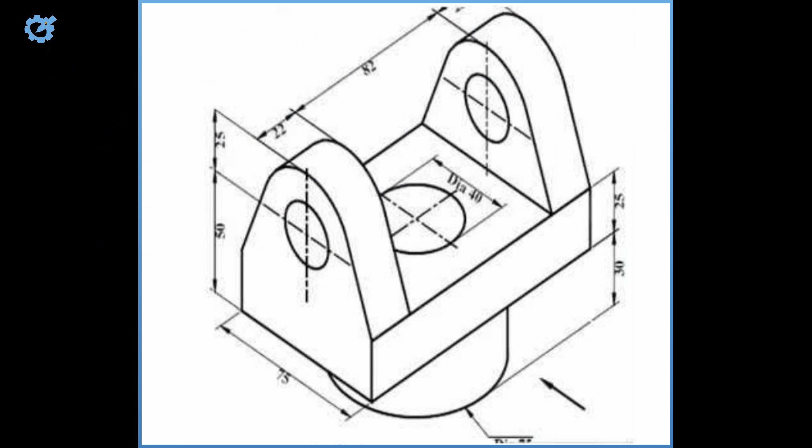We'll be reproducing the object on the screen using isometric projection. We'll be producing it in isometric projection. Alright, so the very first thing is I'm going to produce the bottom cylinder of diameter 75 mm, and to draw that I'm going to first of all produce a horizontal line in this order.

Then after that I'm going to produce a vertical line to it, and here is the vertical line like this. Each of these lines should be produced faintly. Now to draw an isometric, we'll be using our 30 by 60 degree set square. This is the set square right here. This longer part is the 30 degree, while this area is 60 degree. For this drawing, we'll be using the longer part, which is the 30 degrees.

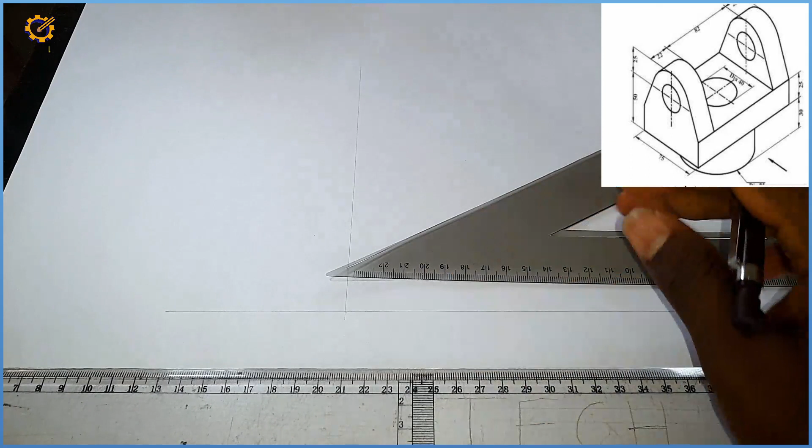From this point of intersection here at the perpendicular junction, I'm going to produce a line at angle 30 degrees to the horizontal plane, which is this, like that. And towards this side also I'll be producing a line at angle 30 degrees to the horizontal plane, which is this also. Take note of those lines.

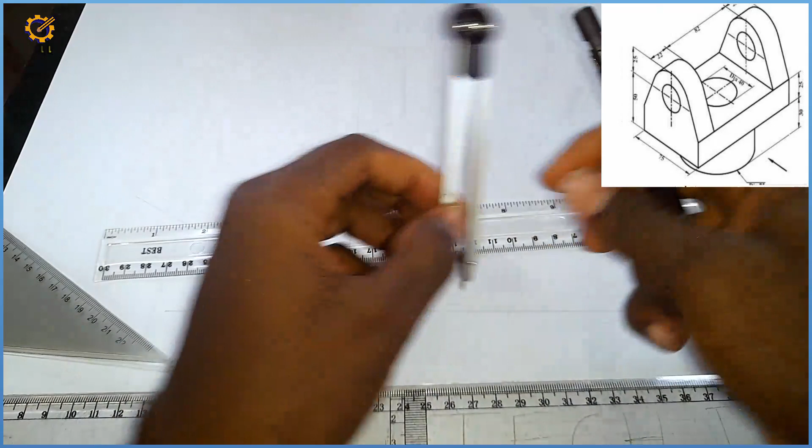Now the base of this cylinder is diameter 75, and to proceed with that I'm going to pick my ruler and measure 75. Let me just pick my compass to make it far easier. I'm going to measure 75 mm with my compass. This is 75. Standing at this junction, I strike an arc right here. Then on this axis also I strike an arc right here with the same 75.

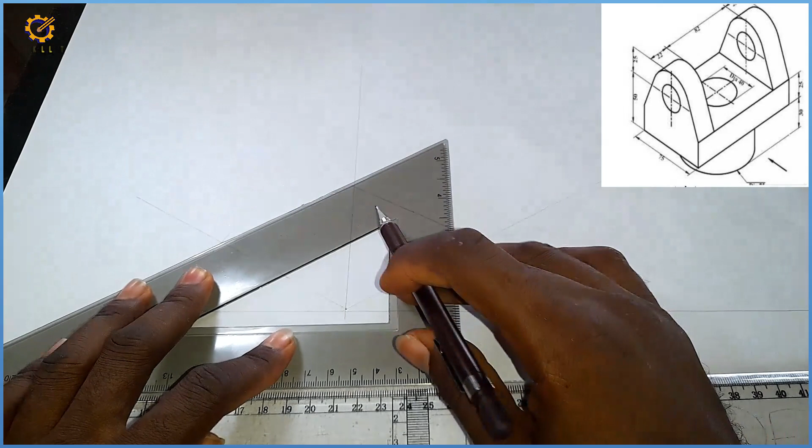Doing that, I'm going to pick my set square with 30 degrees. I'm going to project from the 75 here like this faintly. Then also I'm going to project at the 75 here also, like this faintly. So from this area 30 degrees and from this area 30 degrees, I have that base right there.

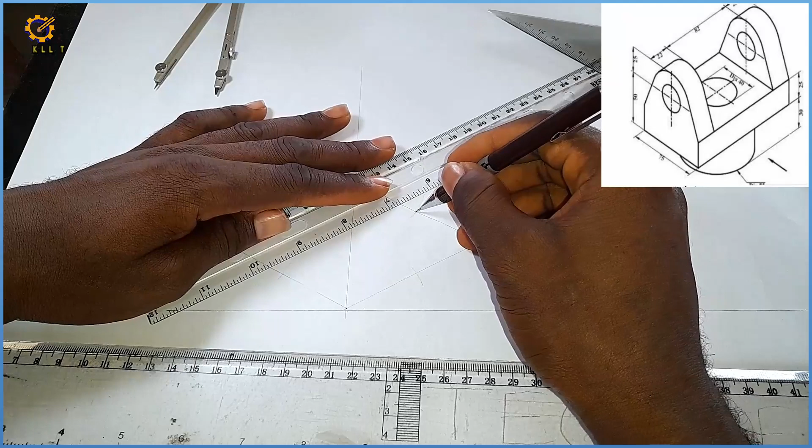With my compass, half of 75 is 37.5. With my compass I measure 37.5, which is this. I'm going to stand right here and mark, right here mark, and right here I mark. With that I'm going to pick my ruler and join those midpoints together faintly like this.

Do you see that? Take note. Then likewise from this area I'm going to join it faintly, midpoint to midpoint, like this also. So we have that. Then I'm going to join this junction to this junction, which is the longest diagonal, with my ruler faintly also.

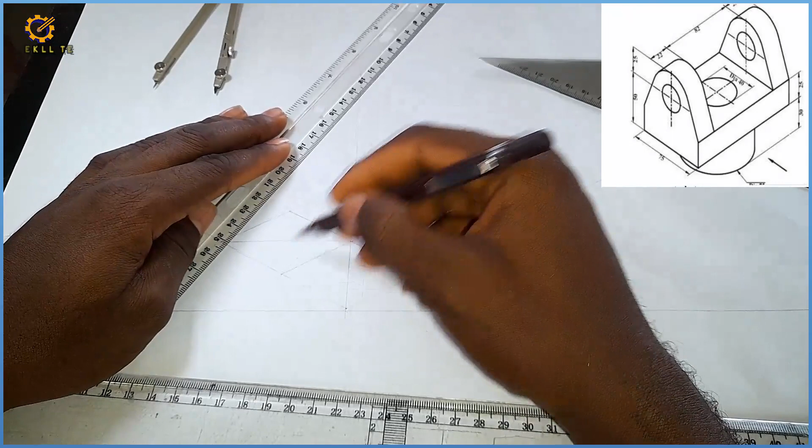After doing that, I'm going to pick my ruler from this junction here to this area here and draw this. Take note please. I'm going to draw this like this. You see that? And from this junction here to this junction here, I'm going to draw this also faintly.

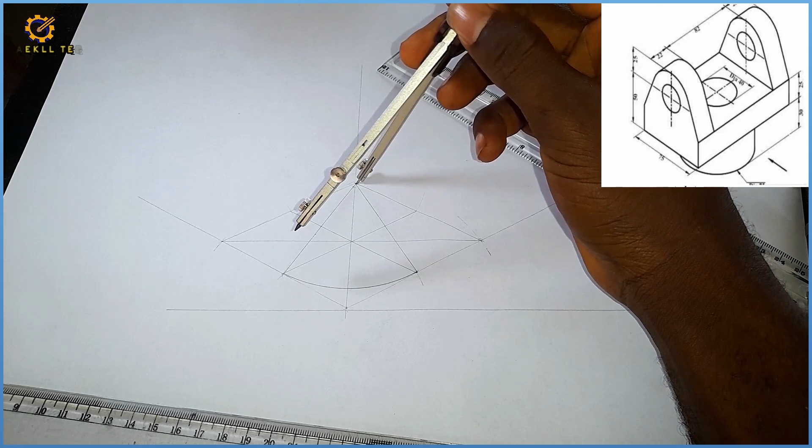Doing that, I'm going to pick my compass. I'm going to sit at this junction comfortably, then extend my compass all the way down to this area here. With that radius on my compass, I draw this. You can decide to draw it faintly or thick, it's your choice. Then you can come back and retrace it. So I'm drawing this now.

What we're actually applying here is the principle of isometric circle or isometric curve, so take note of that. Now from this junction here, I'm going to place my compass right here, then I'm going to pick this radius right here. With that radius I'm going to draw it like this.

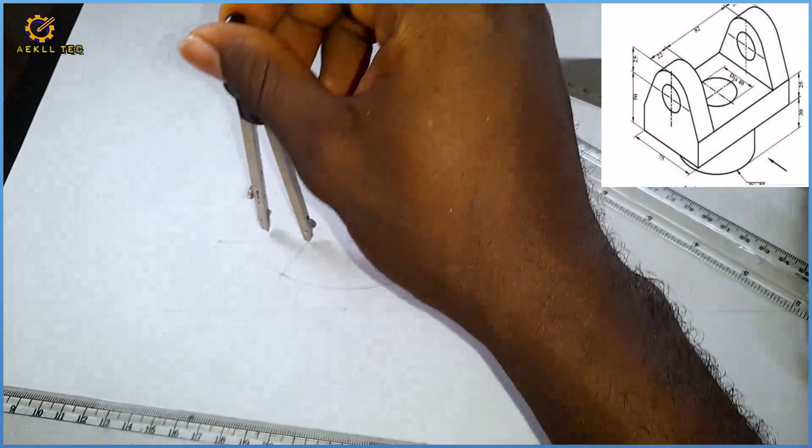You see that? All right. So likewise on this area, but faintly on this area, I'm going to do the same thing faintly like that. Take note of that. All right. Now, the next thing is this.

I'm going to pick a height of 30 mm from this junction here. Okay, height of 30 mm, and that is because the height of that cylindrical part is 30. So from here now I pick 30. This is the height of 30. Okay, from that height of 30, with my 30-degree set square, I'm going to slide it to that area right there like this. Okay, sliding it to the area right there like this.

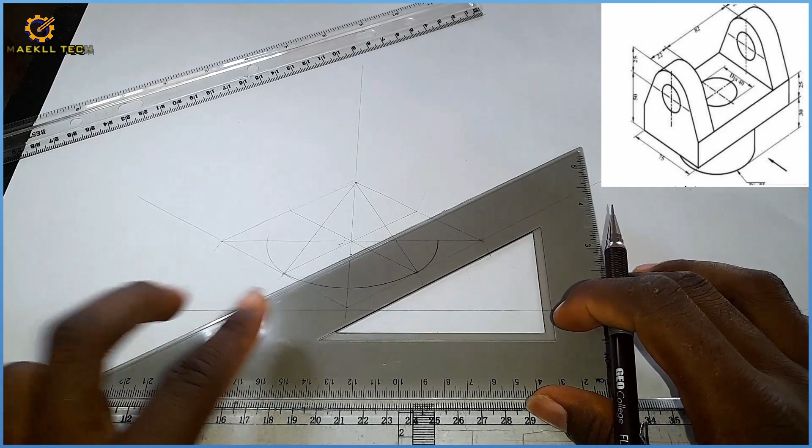All right, then I'm going to draw a line like this faintly all the way through like that. Take note of that. All right, so with my 30-degree also, okay, not with my 30-degree yet. I'm going to pick my set square from this junction here. Okay, from this junction here, I'm going to draw a perpendicular upwards faintly. So the perpendicular line touches this line here on this area here.

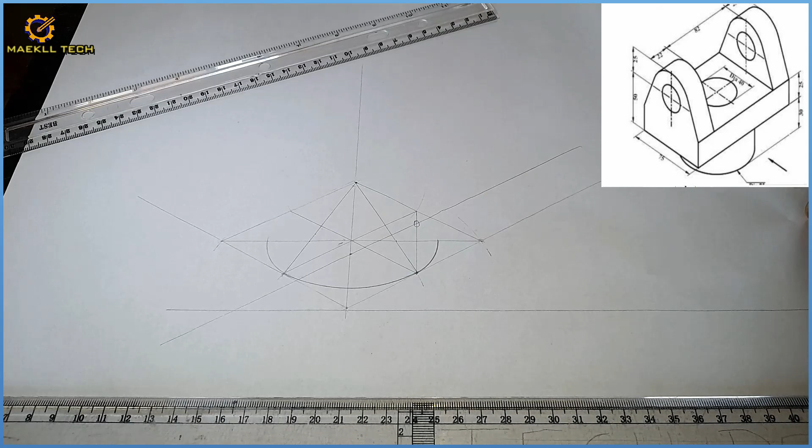So I'm going to pick my compass or my ruler. The total length of our object here at the base is 82 at the middle, 22, 22, and that is a mark of 126. Take note, I am producing this object on the scale of 1:1. So if you want to produce it on the scale of 2:1, you just multiply all the dimensions by 2. But I'm drawing this on the scale of 1:1.

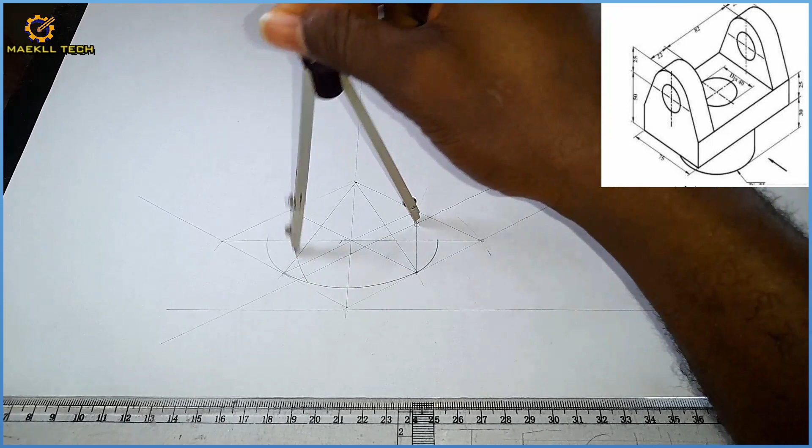So I'm going to pick length of 126 divided by 2, which is 63. I'm going to pick length of 63 with my compass. Okay, radius 63 with my compass. I'm going to stand right at this junction here. Take note. Do you see this junction here? I'm going to strike an arc towards this direction and strike an arc towards this direction. Take note. Do you see that?

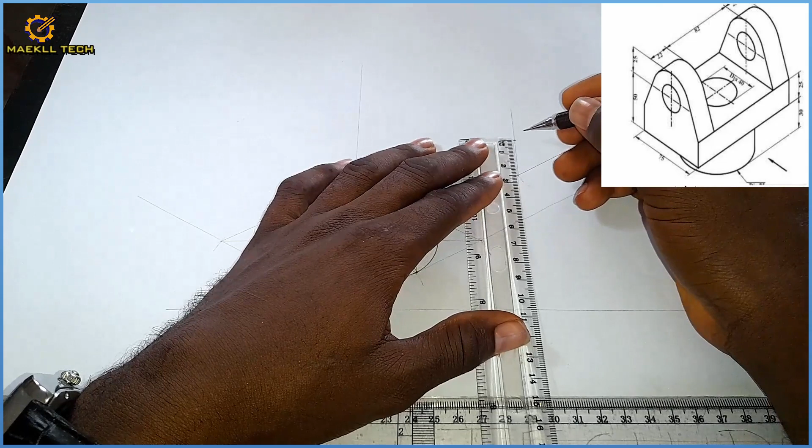So after doing that, I'm going to produce perpendiculars or vertical lines at those marks. So the first mark here, I produce that. This mark here, I produce that also. And the thickness of this base is 25 millimeters. So with my ruler, I measure a mark of 25 millimeters, which is this. Right here also 25 millimeters, which is this. And with my ruler, I draw this.

You can as well make it thick once and for all, because I'm needing it. So I draw this, I make it thick. Alright, take note of that. So I'm going to pick my set square. I'm going to draw this perpendicularly to this base here. See that? I'm making it thick also.

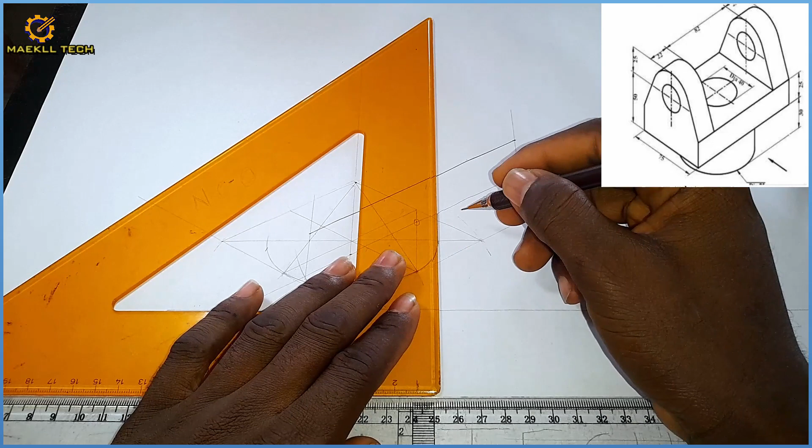Alright, and I'm going to pick my ruler. I'm going to take in this area also like this. I'm going to take in this all the way down here like this. So take note. I'm taking that all the way to that area. Okay, and I'm going to take in this like this. Alright, so we are proceeding.

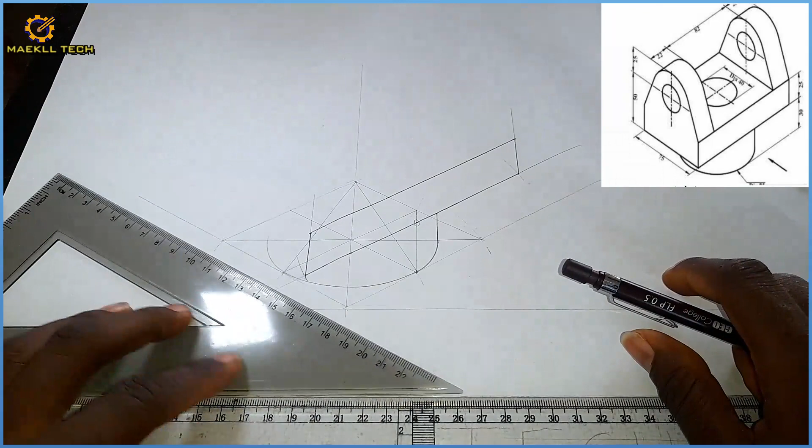So just take note. I'm going to pick my 30 by 60-degree set square at angle 30 degrees towards this direction here. I'm going to project 30 degrees at the bottom like this from that junction, faintly first like that, then sliding it to this area, 30 degrees also like this. Take note.

Alright, so I don't need this any longer. I can actually erase this. Let me erase this so that you don't get confused. So this is the one I'm using. I'm not using this, so I'm going to take this off like that. So do you see that?

So not forgetting that I'm going to actually stand at this junction again, and I'm going to finalize this area, which is here, and that is all I need from that area. You see that? So which means this is not needed. I'm going to wipe it off.

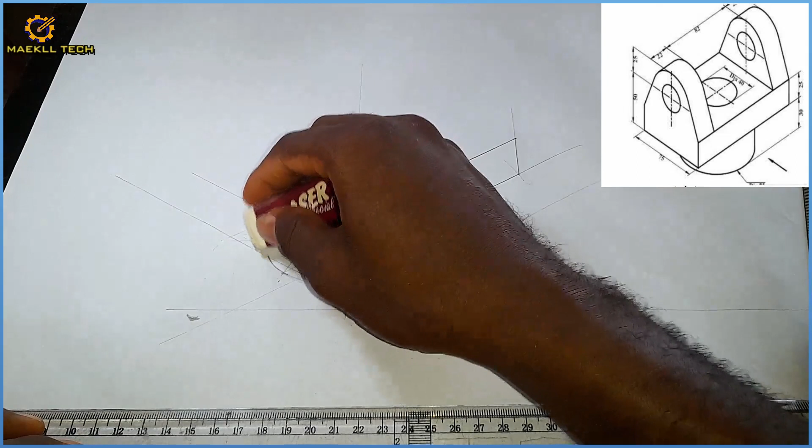Take note. Now with my set square also at angle 30 degrees, I'm going to slide it all the way to the top here. Do you see that? All the way to the top right there. I'm going to draw this also faintly like that. Take note of that also. Let me remove this to avoid confusion.

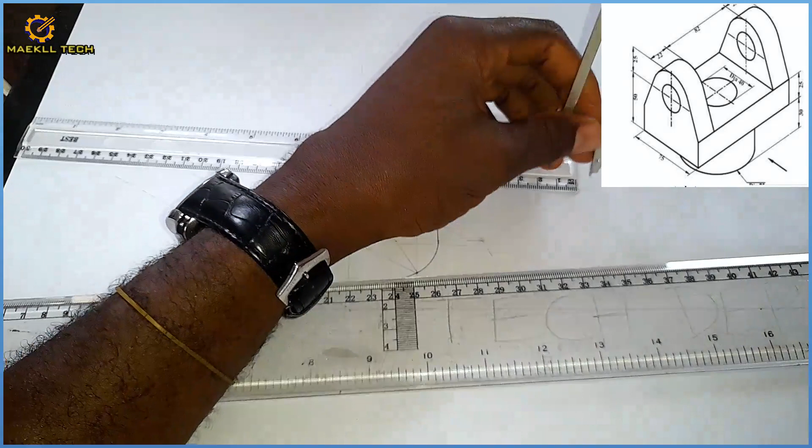Okay. Now the width of our object is 75. So with my ruler I measure. Okay, let me just use my compass to avoid mix up. So with my compass I measure 75, which is this.

Okay, this 75. With 75 on my compass I stand right here at this junction. Standing at this junction, let me just confirm that dimension again so as not to make any mistake. Okay, it is still intact. With 75 I stand right here, I mark. You see that? With 75 right at this junction here also I mark. Probably from here also I mark.

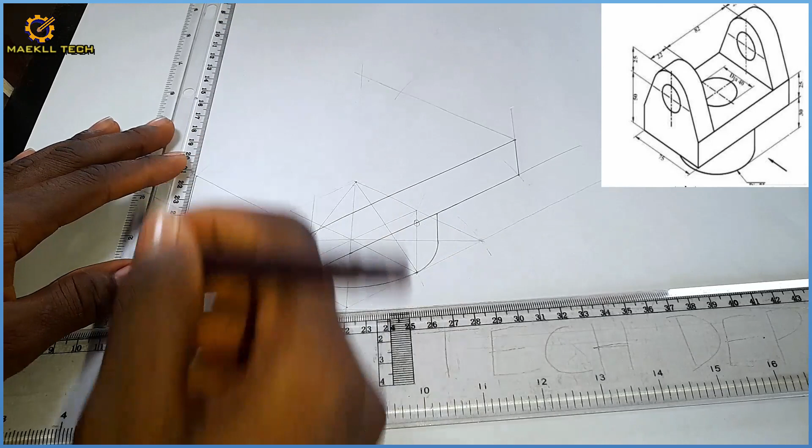So with my ruler I can join these areas together like this. I'm going to make it thick once and for all, making it thick like this. Then here to here I'm going to make this area faint, thin here, faintly like that. Take note. All right, so this bottom part I'm going to make thick also.

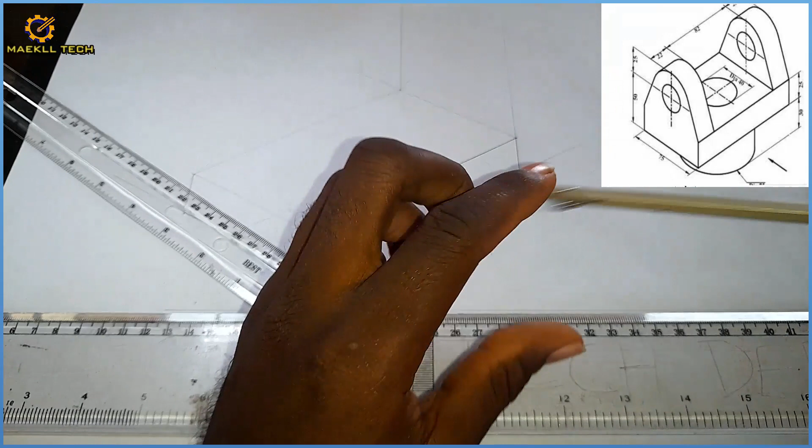Now the real work begins. Yeah, don't be amazed I said the real work begins. You actually see what I'm trying to drive home. So I'm going to extend this vertical line here faintly upwards. Likewise from this area also faintly upwards like that. You see that? Now I'm going to pick my compass. No, I don't need a compass. I can use my ruler.

Sorry for the noise, my place is close to the airport, right? So that's the noise you're hearing in the background.

I'm sorry for that. So from this junction here to the top is a mark of 50. From this area to here is 50. So from this area to the top here is 50. I'm going to align it like this and draw faintly, joining them together faintly like this. Did you see that? Okay, now take note of that.

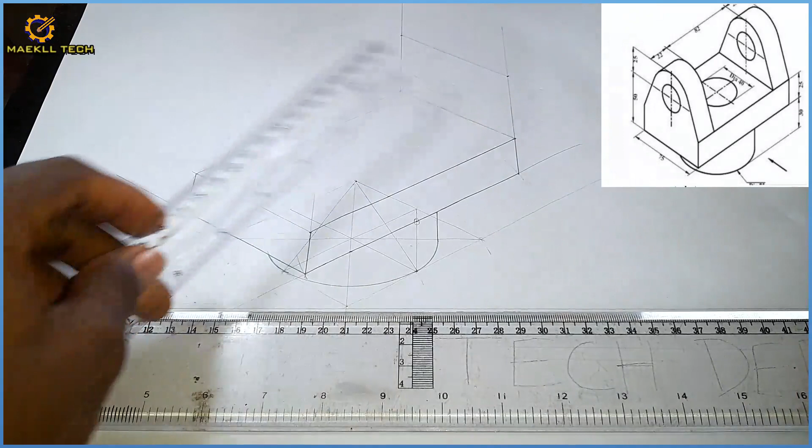So I'm going to get the midpoint of this thickness here, this dimension, and the midpoint is 75 divided by 2, that's 37.5. With my compass I pick 37.5, which is this. Then I come here, I mark. I come here, I mark. I'm going to join those 2 points vertically, faintly, like that. So take note of that.

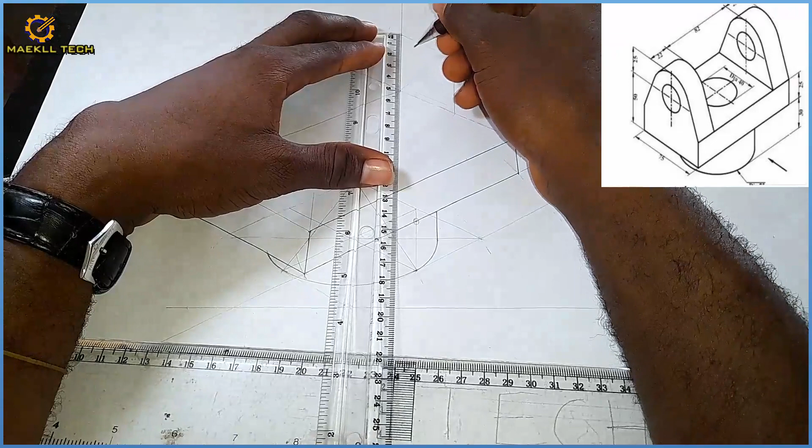All right. So this height of 50, I'm going to get the midpoint, and the midpoint there is 25, which is this right here. And likewise, from this area 25 is this. So I'm joining those 2 points also faintly like this. Now, what's the next thing?

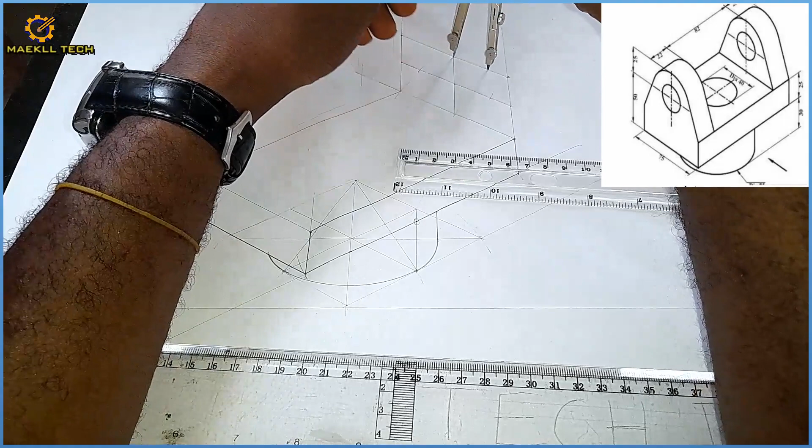The radius at this top here wasn't given, but since the distance from here to here is 50, I'm going to use a radius of 25. So I'm going to pick my compass with radius 25. Radius 25 is here to here, like this. So with 25 I'm standing right here at the junction in the center, marking left and right. I'm standing at this one up here, marking left and right.

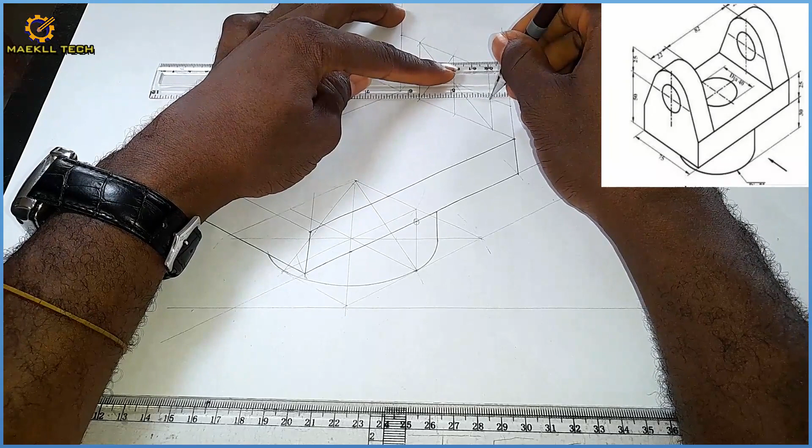Having done that, with my ruler I'm going to join those 2 points together vertically like this, faintly. You see that? Then coming down here also, faintly. The principle I'm applying is the same thing I did here, the principle of the isometric circle or isometric curve. Next I'm going to join this longest diagonal here faintly, then join this area to this junction faintly, then this area here to this junction faintly.

After doing that, I'm going to pick my compass, sit right at this junction here, and extend my compass to this area right here. Take note of those points, and I'm going to draw this faintly first of all. Then standing at this junction right here, extend my compass to this area and draw this also faintly. Take note, I'm drawing them faintly.

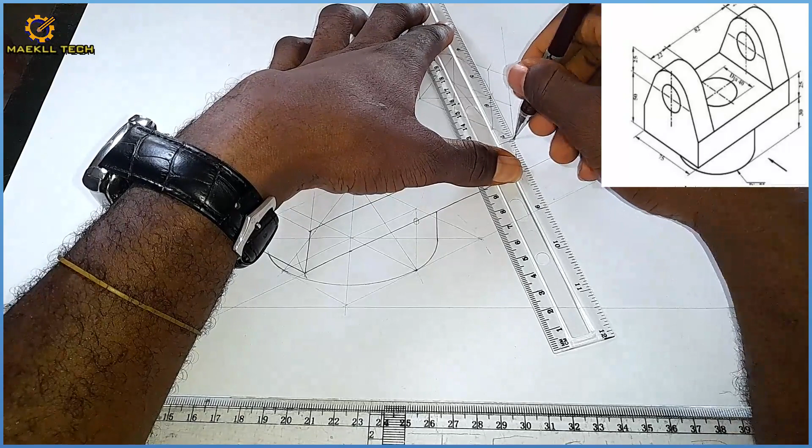So from this junction right here with my ruler, tangential to this arc. You know what a tangent is? A straight line that touches the circumference of a circle or an arc at a point. So I'm going to draw from this junction to this arc, this part of the circle, tangentially. I'm going to make that bold once and for all. Do you see that? That is settled.

Since that is settled, I can thicken this from here. I'm going to repeat this and just thicken it out like that. Then this, I'm going to pick this.

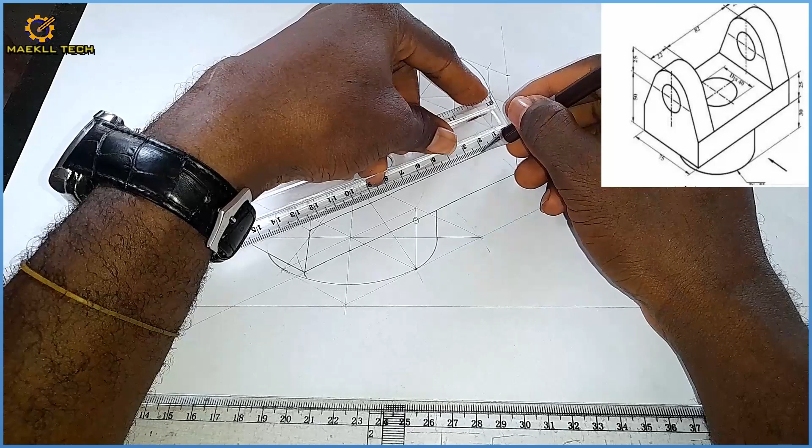So from the midpoint here, from the middle there, I thicken. You see, I thicken from the middle there. I don't actually need this part here. So that's it. So are you following? Please look closely. So now the distance of our object of this area here from this edge here inwards is 22. With my ruler I pick a mark of 22, which is that. From this area, mark of 22, which is this.

Now the reason why I'm measuring a lot is because the set square I was using, my 30-degree set square, somebody stole it from where I left it. Because when I did the photographic, I left it to sort some stuff. So before I came back, somebody stole it. So I just need to improvise, alright? So just bear with me. Okay, so this video might be somehow long. Just bear with me. I'm very sorry for that.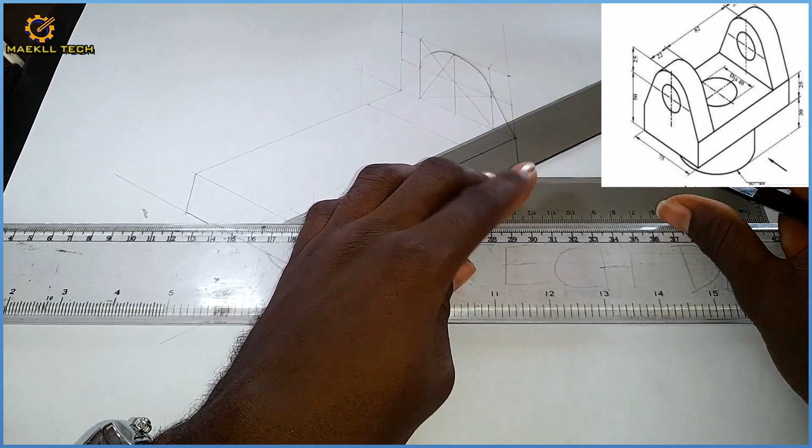Okay. Now, having this to this 22, here to here 22, I'm going to produce a vertical line. Do I need that? No, I don't need it on the outside there. So this is what I'm going to do. I'm going to pick my 30-60-degree set square, my 30-degree set square. I'm going to come here like this, slide it to this junction here, and draw from here faintly. Do you see that? I'm going to slide it here, draw from here faintly, then from here also, like this. So take note of those areas.

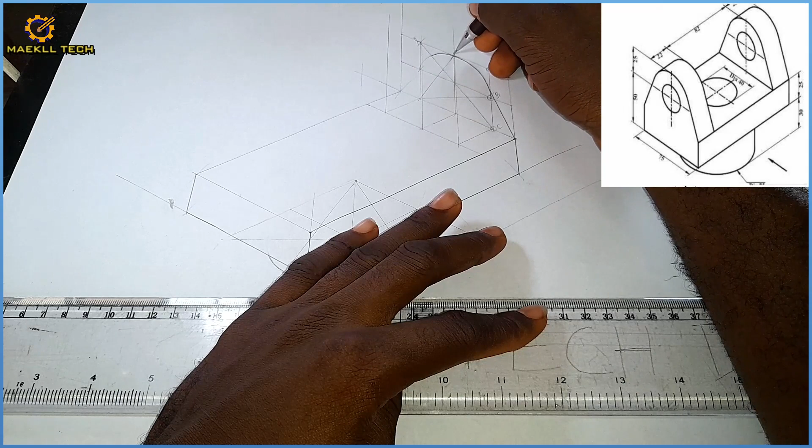Then I'm going to pick my set square. Each of those junctions will be projected vertically upwards. One faintly, two, and three. So take note of those points. Now note this area here, I'm calling this A. This area here, I'm calling it B. And this bottom here, I'm calling it C. This area here, I'm calling it D. This midpoint here, I'm calling it E. Take note. All of this stuff, you don't need to do that on your paper. I'm just trying to show you something so that you don't get confused.

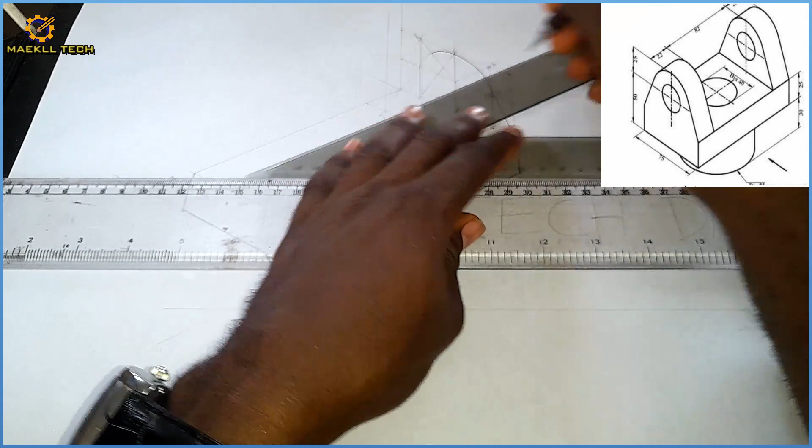So from mark B, which is the midpoint here, take note of this line here. I can denote this as H, I, and J. I'm going to project the midpoint of B to my H here. So from the center of B, 30 degrees. So here is my B complement, this junction. Take note. And my A also will be projected like this. So here is my A complement, take note of that. So from my A complement I can project this.

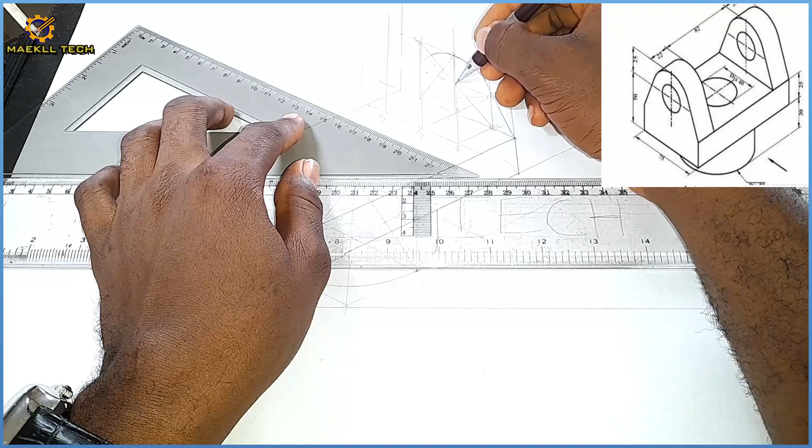Let me just erase some stuff so that I don't get confused, like this. So take note of this line here coming to this junction, where this H and A intersect. That way I'm drawing now, projecting it at 30 degrees, like this. Did you see that? It should be faint on your own paper. So now K, J, K, H, A complement. I have another square on the inside now. Take note, this square. That's what I'm dealing with now.

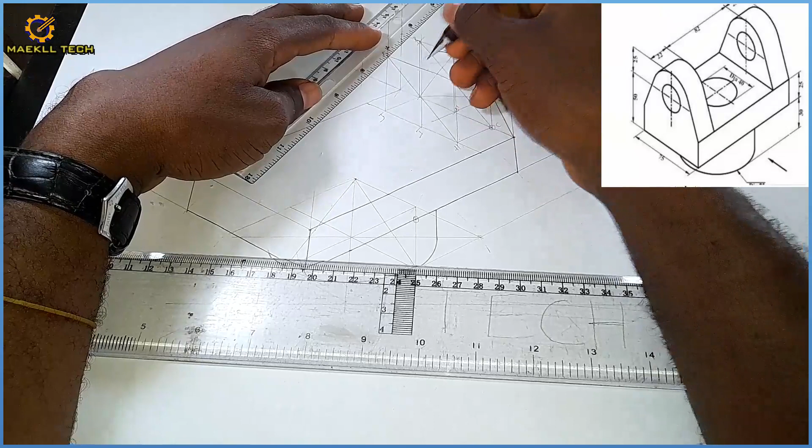So I'm going to join the longest diagonal here also, faintly, like this. After doing that, I'm going to pick my ruler. Take note of this area, this I, where it intersects here. Take note, please. Maybe I should just zoom it out a little for you, so that you can see what I'm doing clearly. Yeah, I think it's better this way. So from this junction now, this I line, let me show it very well so that you can see. This one is not part of it, so that you don't get confused.

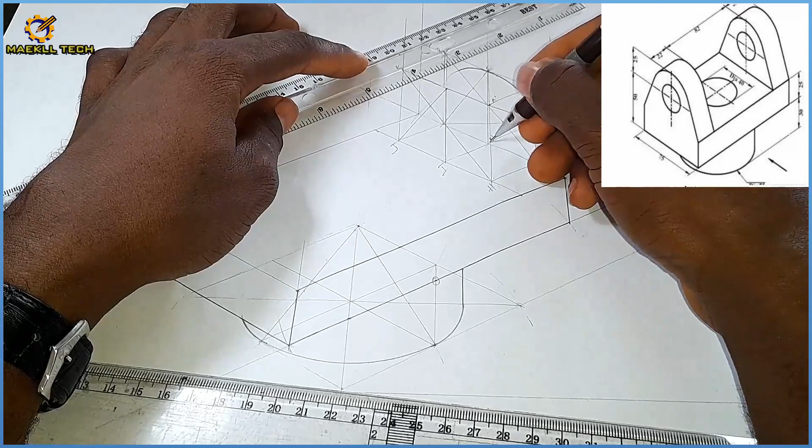Yeah, this I line, okay, that junction to this area, like this, faintly, you see it. Then this area here, this junction here, take note where this B and this H intersect, which is here, to that same midpoint here. Okay, faintly, you see that also. So then I'm going to pick my compass.

Picking my compass, I'm going to come right to the junction here, extend it to this area here like this, and draw something. I'm going to make it faint first of all. Alright, then I'm going to place the same compass right here like this to this very junction here, and draw this also faintly like that.

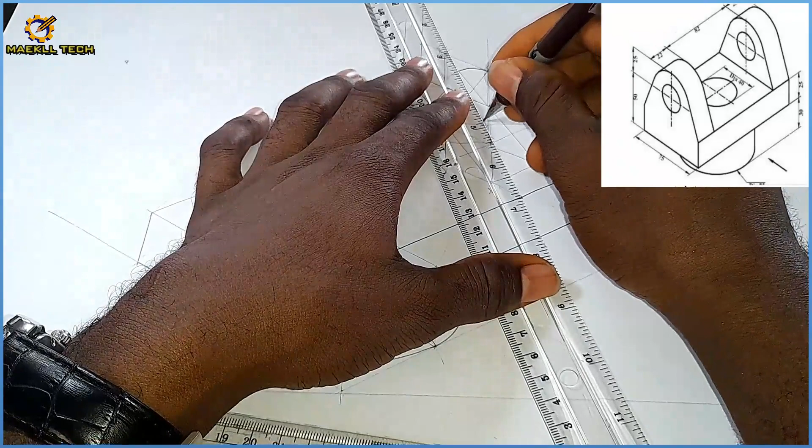So I'm going to pick my ruler. This is my mark of 22 here. Okay, tangentially to this, the same thing I did here, tangentially here. So I'm going to draw this like this, make it thick once and for all. So having it that way, the midpoint here to the midpoint here. Okay, take note of that. I'm going to join that like this. I'm going to make it thick once and for all.

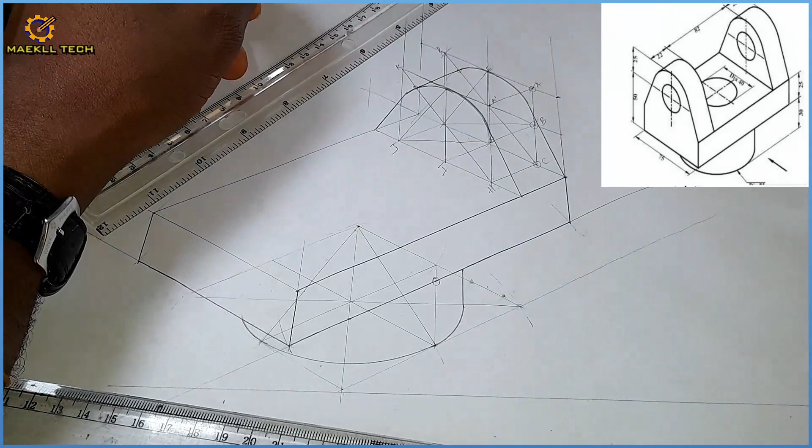Then from this junction to this curve here, I'm going to just make it tangential like this. Okay, tangential like that. Then I can now take out the stops with my compass. Alright, I'm taking it out with my compass right there. Then from here also, so that is it. So this area is set like that. Can you see? But it remains a circle on the inside, and that circle is diameter 25.

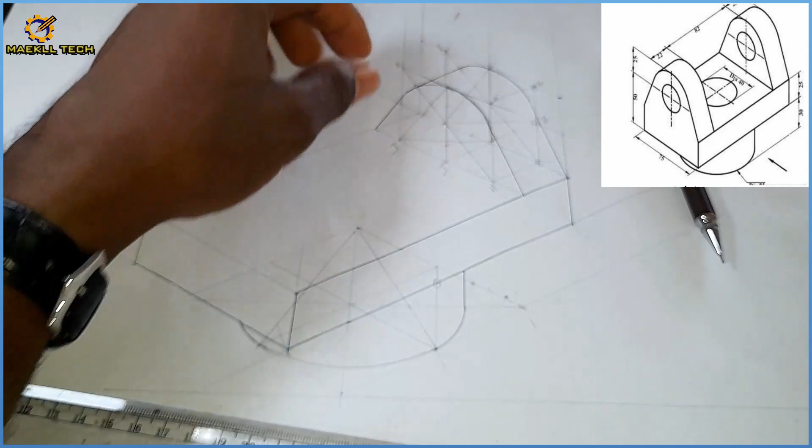Diameter 25, that is going to be radius 12.5. Okay, so with my compass I'm picking radius 12.5, which is already there. Sitting at the center, take note, sitting at this middle right here, I mark left, right, and from that same middle, bottom and top. See, I mark. So with that I pick my 30-degree set square.

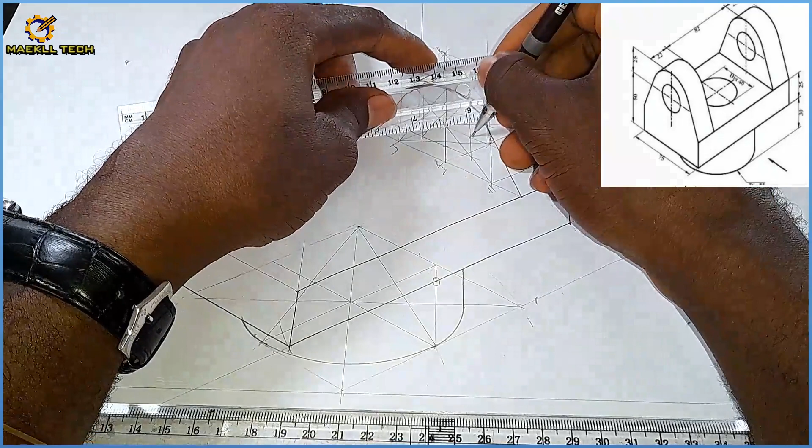Okay, I project to the bottom where I mark, I draw faintly. I project to the top which I mark, I draw faintly. Alright, then vertically on this mark here, I draw faintly. Then on this mark here, vertically, I also draw faintly. Alright, so doing all of that with my ruler from here to this place here, I make it faint, from here to here also.

Make it faint. So picking my compass now, standing right here to this area here. Take note of the point I'm picking. That's why I'm not fast. It's okay, that's why I'm taking it slow. Okay. So I'm going to draw this. You see that? Okay. Standing right here, from here to here. You see that? This junction to this junction here.

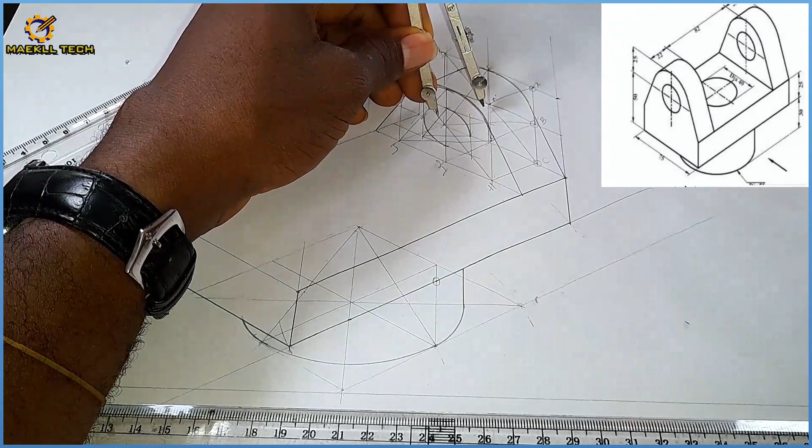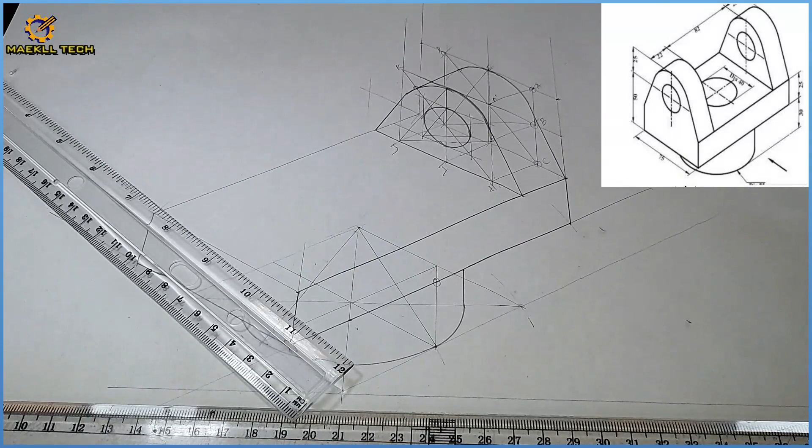Okay. Then with my compass standing right here. You can see what I'm doing. Standing right here to this area like this, I draw. Then standing right here like this, I also draw. You see that? Then I'm going to pick my ruler and join this point, bottom point here like this. Make it bold. Yeah, that is that area right there. So now I am proceeding all the way to this area.

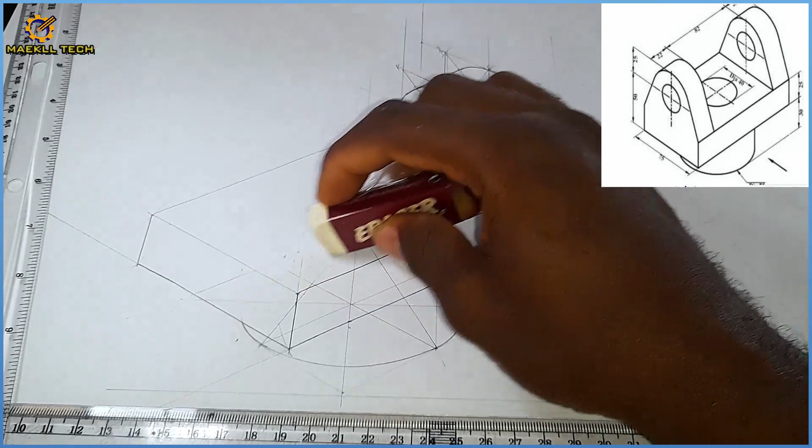So okay, let me erase. Don't erase on your sheet. I'm only erasing so that you won't get confused. On your own sheet, don't erase this part I'm erasing. Just make them very faint, make them very thin. You understand? Because those are part of what your lecturer or instructor will use to assess your work. It is going to be part of your assessment. So don't erase them, please.

That's why I said you should draw them faintly. They will be in the background. But I'm only erasing them so that you don't get confused. You get that, I'm erasing those tiny lines. You shouldn't erase them. So exactly. Now, having this area clear now.

Okay. So I'm going to try and locate the midpoint here. And to locate the midpoint here, I'm just going to pick my set square like this. Okay, from this center here all the way. Do you see that? And I'm going to transfer this midpoint all the way down.

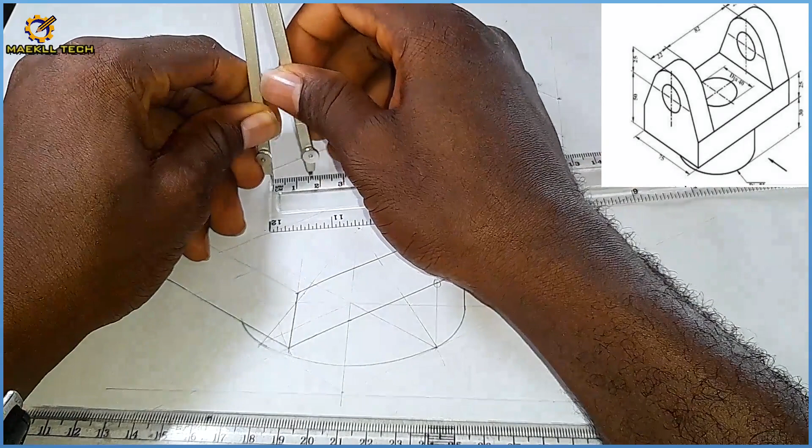So that's it. That's our center right there. So diameter 50 is what? Radius of what? Radius of 25. So with my compass, I measure radius 25. This 25 on my compass. I stand right here. I mark left and right.

Okay. I pick my set square. Alright. The mark here, I project it faintly upwards. Do you see that? Midpoint here, I project it faintly upwards. Then this area also, I project it faintly upwards.

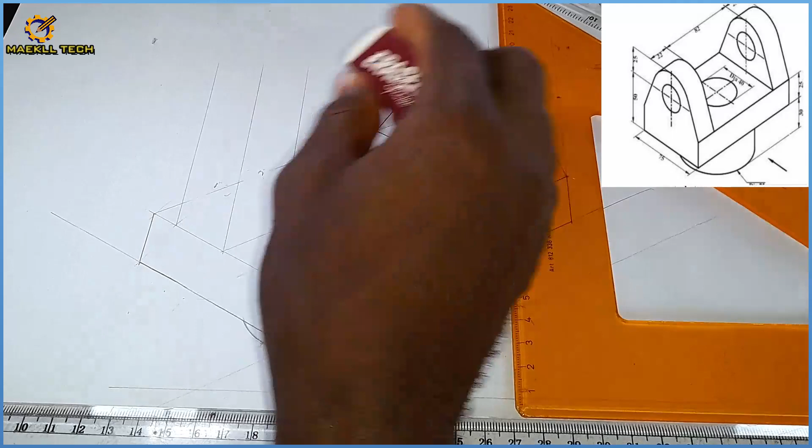Now, let me erase lines that will disturb you. On your sheet, you don't need to erase them, it's part of your work. But right here, I'm erasing it so that you don't get confused. So take note of that, right?

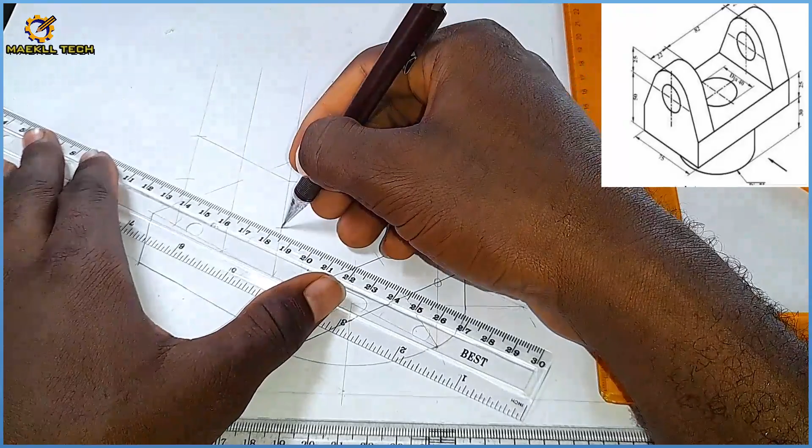Okay. So now, with my 25 likewise, I'm going to stand right here. I'm going to mark 1 and 2. I'm doing the same thing right here. I'm marking 1 and 2. So marking those areas, I'm going to align this to this. Then join 1 here to here, and joining 2. You see that?

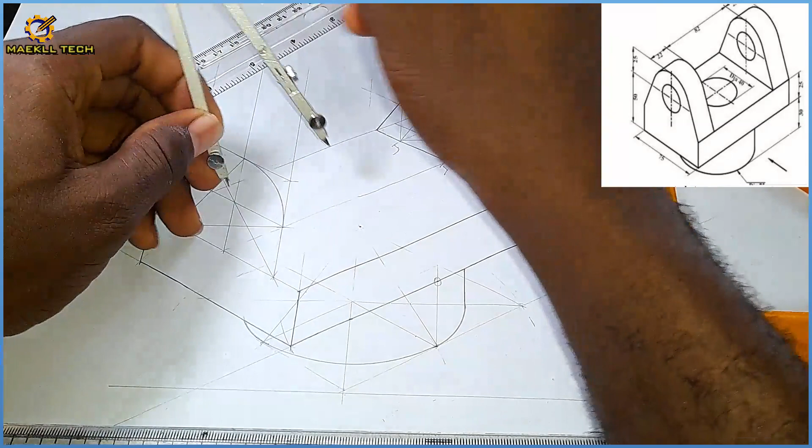So I'm going to join the longest diagonal from here to here like this faintly. Alright, then from here to here like this. Okay, then from this area to this area like this. You see that? So next is to pick my compass, right? Standing right here to this area. I draw. I'm drawing faintly first of all, right? Then standing right here like this to this area. I draw faintly also.

So having that, I'm going to pick my ruler from this junction tangential to this area like this. I draw. Then I'm going to do the same thing also from here tangential to this curve here like this. Okay. Yeah, like this.

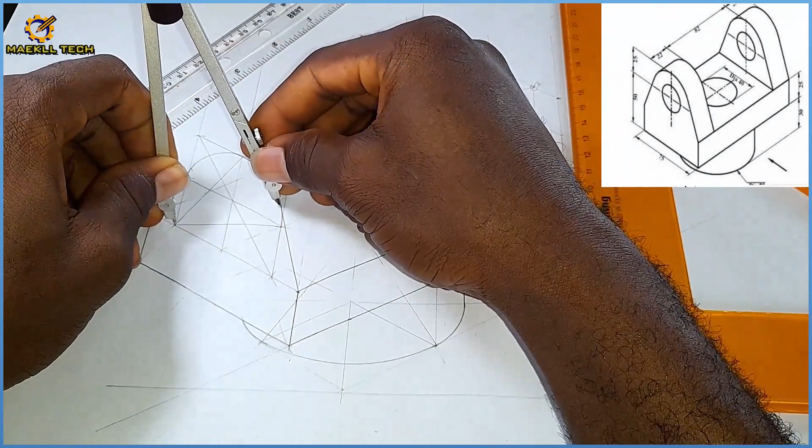I draw also. So with that settled, I can thicken this area out now from here to here like this. So thicken that, and right here, I'm going to thicken this also. Like this. You see that? So settled, right?

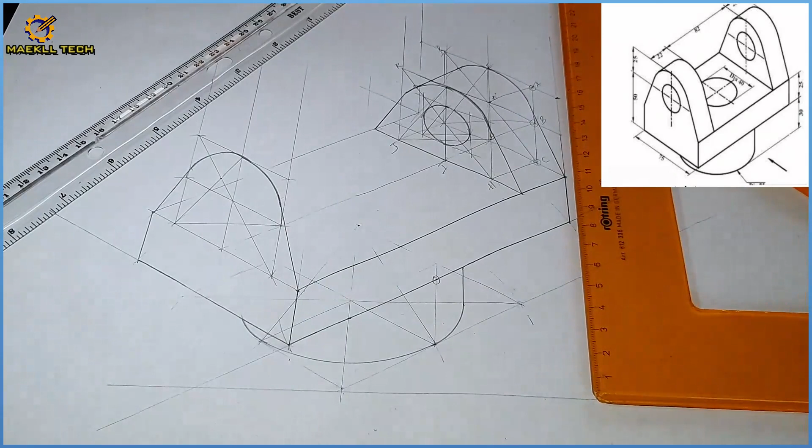Okay, so distance there is what? 22. With my ruler, I pick mark of 22, which is this. Okay, I don't even need to pick it over there. So let me just project this junction inwards with my 30-degree. Like this. You see that?

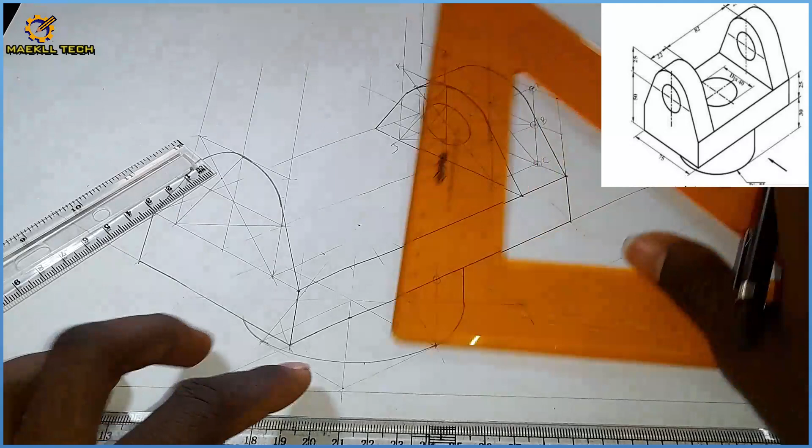Alright. So then I pick my ruler, distance of 22, which is this. Okay, I'm going to project that vertically. Okay, like this. Alright. So I'm going to project this area here like this.

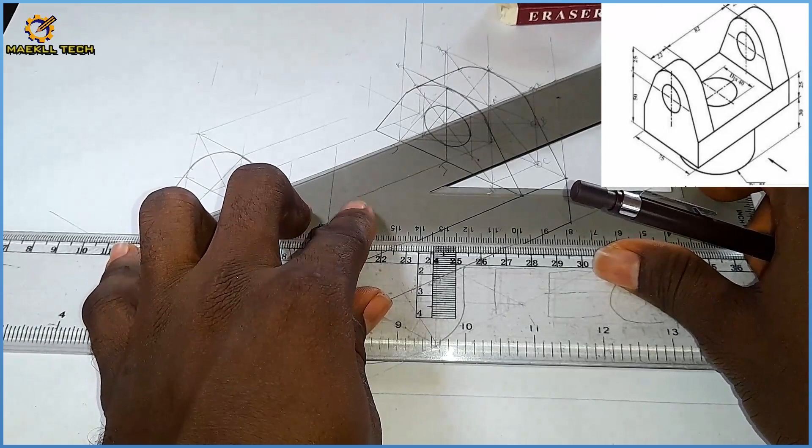Okay, let me wipe these ones off so that you don't get confused also. Alright. So with my 30-degree set square, from this area I draw faintly. From this area I draw faintly. And from this junction here, I draw also faintly. You see that?

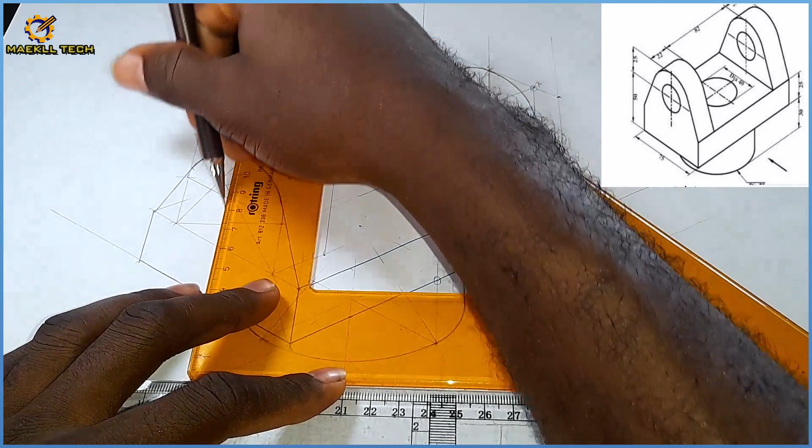So then I'm going to set my set square like this, to this junction here, and I'm going to draw like this. Do you see that? So take note. So all I'm going to do now is this. I'm going to pick my set square from this junction, vertically downward. Okay, to still come down, sorry. Okay, that's settled.

Then from this junction at 30 degrees, like this. So I'm having the first edge of my square, second edge, third edge, and the fourth edge. Take note of that. So with my ruler, I'm going to join here to here like this, faintly, right? From this junction here to this area here like this.

Come here, just be careful. Yeah, like this. Faintly, you draw it faintly, okay? And this junction also. I made a mistake with this one here. So take note. This junction here of our square to this area, now where I'm joining. So I join that, from this area here to this same junction here. Alright, I join that also.

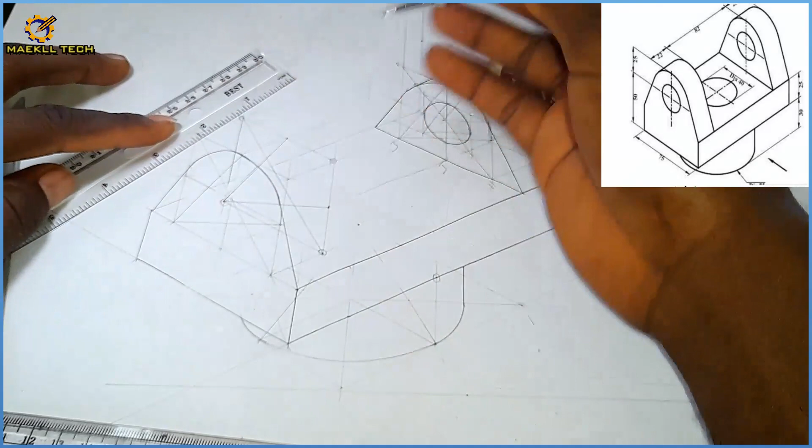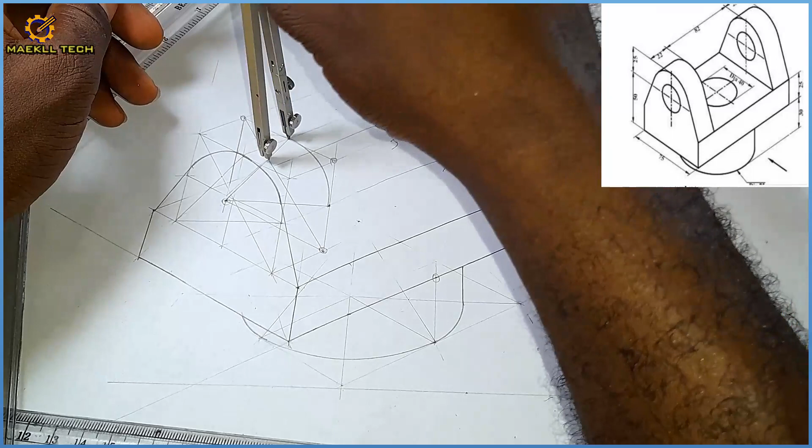You see that? So then I'm going to pick my compass now. With my compass standing right here to here. I draw faintly. I make it faint. Then standing right here like this, to this area here, I also draw faintly. I make this faint.

Then I'm going to join this area to this area here. I'm going to make that thick first. So after thickening it with my compass, I can come back here and thicken the shape right there. You see that?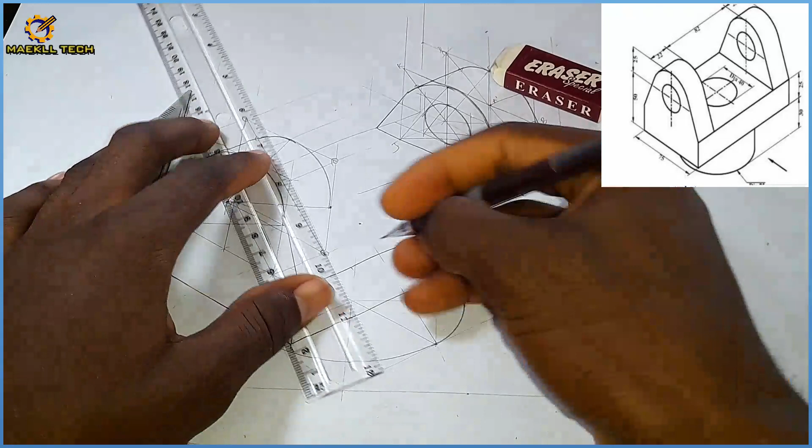So likewise, this is the mark of 22 here that I measured earlier on. Here to here is 22, from this area tangentially to this. I'm going to make it thick. Alright. Then I can now thicken my curve here.

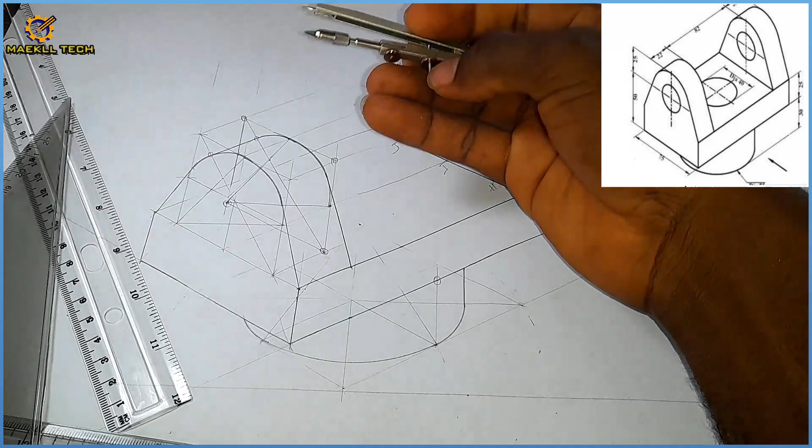You see that? That is it. So we have a circle right here, just like this. Around that one, the diameter is what? Diameter 25. That's radius 12.5. So with radius 12.5 on my compass at this midpoint here, yeah, the center here. Take note of that center there.

I'm going to mark left, right, top and bottom. So I'm going to pick my 30-60, my 30 degree set square, from this point here. I draw faintly, sliding it to this point here. Also, I draw from here also faintly. Take note, just take note of what I'm doing.

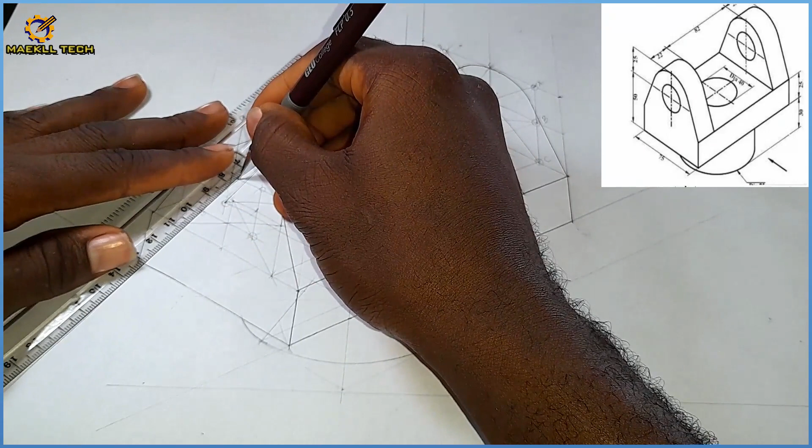Alright. So with my set square from this area which I mark here, I draw faintly. Then this area here I draw faintly. So this forms my square. Take note of that. So I'm going to pick my ruler. Picking my ruler from this junction here to this area here like this. You see that? Like this, and from this junction here to this area like this.

Okay, and I'm going to pick my compass. With my compass, I'm going to sit at this junction here, extend my compass to this area here, and draw something smooth like this. Then standing at the opposite corner here, I'm going to join this like this. Take note. Right, then sitting at this junction here like this, I'm going to draw this.

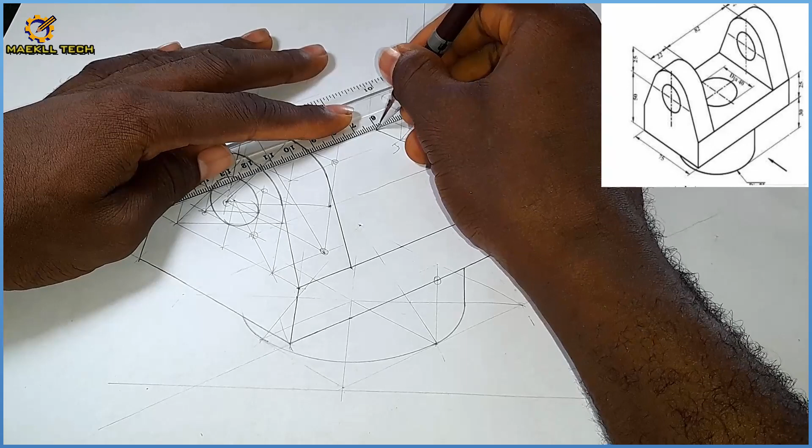Can you see that? Then sitting right here, I'm going to draw this also. I'm going to draw that also. So you see, we're almost done. Alright, then I'm going to join this all the way down here like this. You see that? I'm joining that.

So we have a circle of diameter 40 at the center here. Okay, and let me just get the mark from the edge here, mark of 63. Okay, I don't even need to start getting. This is our center here. So I can as well project this area upwards like this. Yeah, this area project it upwards. So these are midpoints right there.

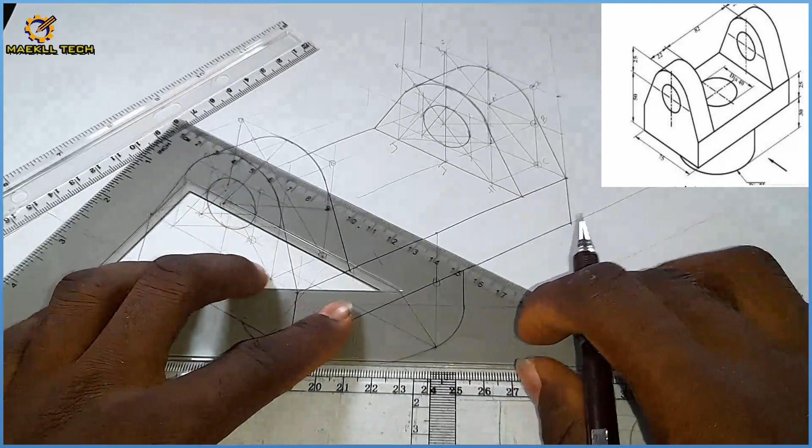Okay, so with my 30 degree set square, I'm going to slide to that midpoint and produce this like this. You see that? So now this is the center line here, and this is the center line where they meet at this area here, and the circle here is diameter 40.

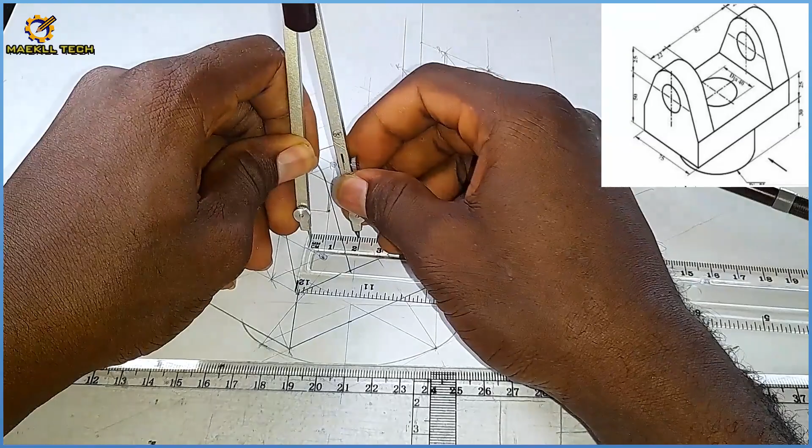So with my compass, I'm going to pick radius 20. With my compass, radius 20. So I pick 20 now. This is 20. Okay, this is 20. I stand right here. Then I mark 1, 2, 3, and 4.

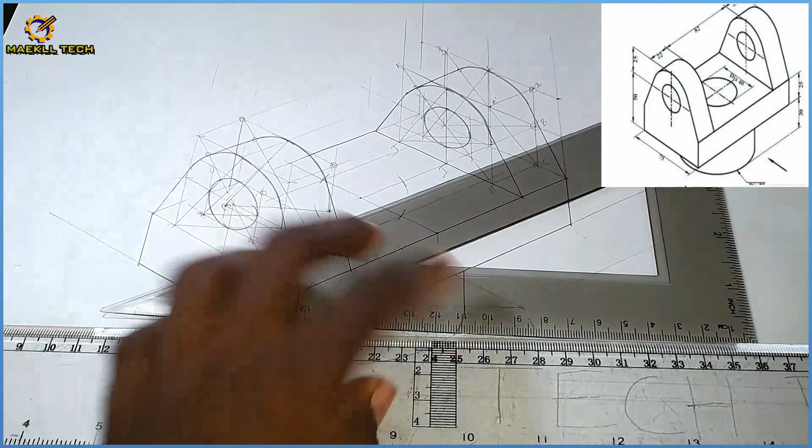So next is pick my set square, 30 degree set square. Slide to this area here. Okay, this area here, and draw this faintly. Do you see that? Slide to this junction here. Take notes. And faintly. Okay, slide to this area here also, and faintly, then slide to this area here, then faintly. All right, after doing that, I'm going to join the longest diagonal.

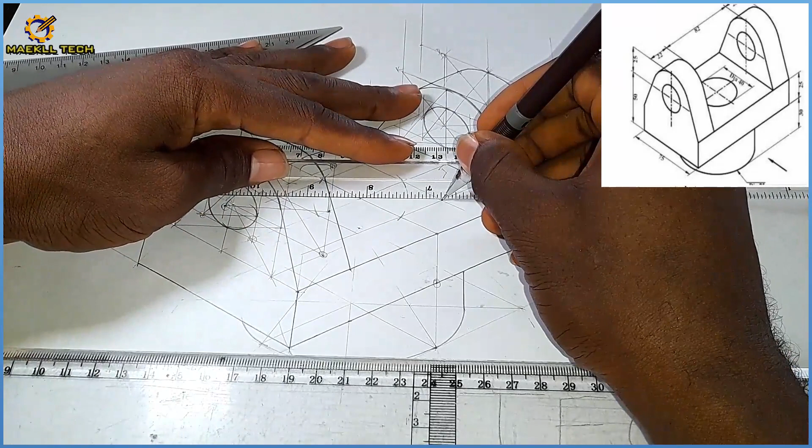Okay, yeah, I am going to forward the video to you on the basics of this thing I'm doing, this principle of isometric circle. I have a basic video on it that will take you through the rudiments. All right, I will share that with you also.

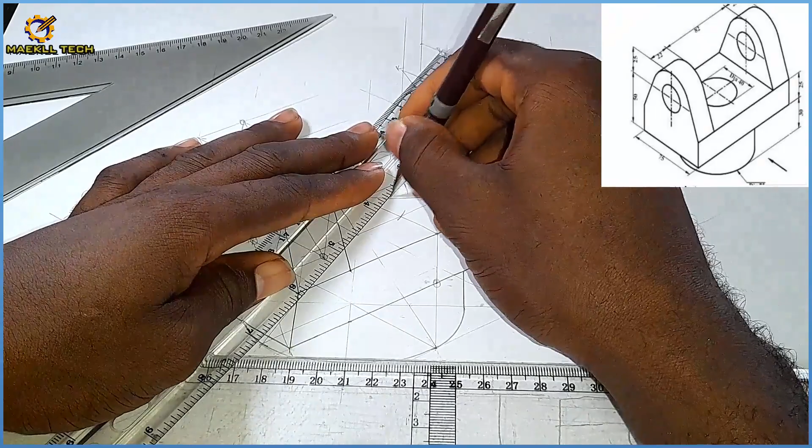So from this junction up here, okay, from this to this, like this, then I'm going to pick my compass. With my compass right now standing right here at that junction, extending my compass down here like this. All right, like this. I'm having this, like this. You see that? So standing right here, I'm having this here.

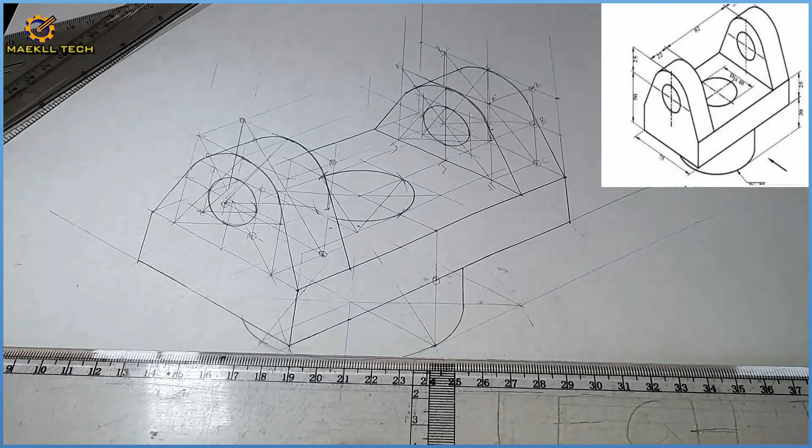Yeah, so I don't actually need this part since it is infringing. So let me retrace this area here. Okay, so all I have to do is just cover this area up, which is from here to here, like this. All right, like this. All right, and that brings us to the end of this problem. Yeah, that's quite long, but it's actually worth it.

It's worth it. All right, so that is the isometric projection of the object on the screen on a scale of 1:1. Take note, if you are to produce this on a scale of 2:1, you are going to multiply every dimension used here by 2. You multiply them by 2.

All right, sorry for the noise. I told you I stay closer to the airport, so that's the noise of an airplane. I'm sorry for that.